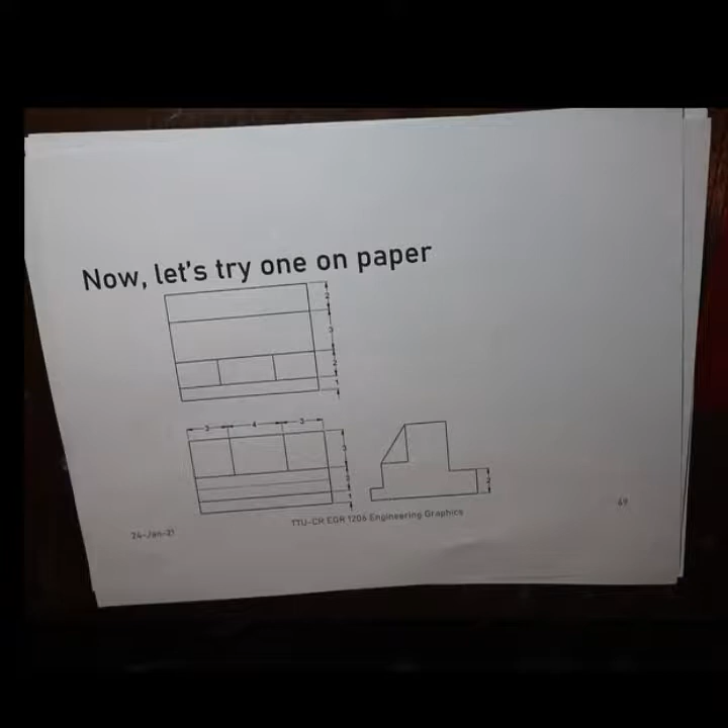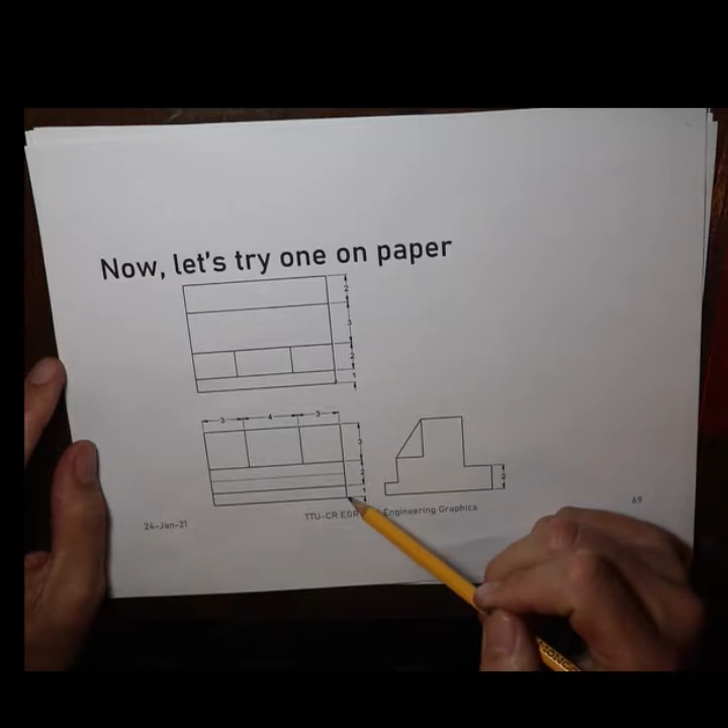Okay, now let's do our drawing here. Right, so we have our front view, our top view, and our right side view. And we're now supposed to create the isometric drawing from this. So let's do this. What we'll do is we'll start on this corner right here. Right, this corner is the same as this corner, and then we'll draw out in all directions.

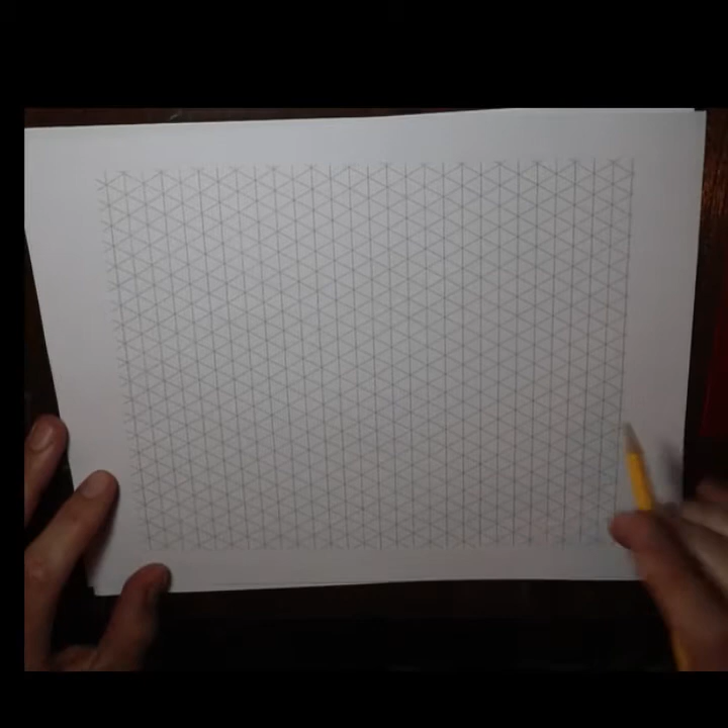So here is my piece of paper. So the first thing I want to know is how big is this going to be side to side. So our front view here is 10, and towards the back it is 8. Okay, so let's count out quickly here if we can do full boxes. If we start maybe at this point right here, just choose one. 1, 2, 3, 4, 5, 6, 7, 8, 9, 10. That'd be there. 1, 2, 3, 4, 5, 6, 7, 8 would be here, so that fits.

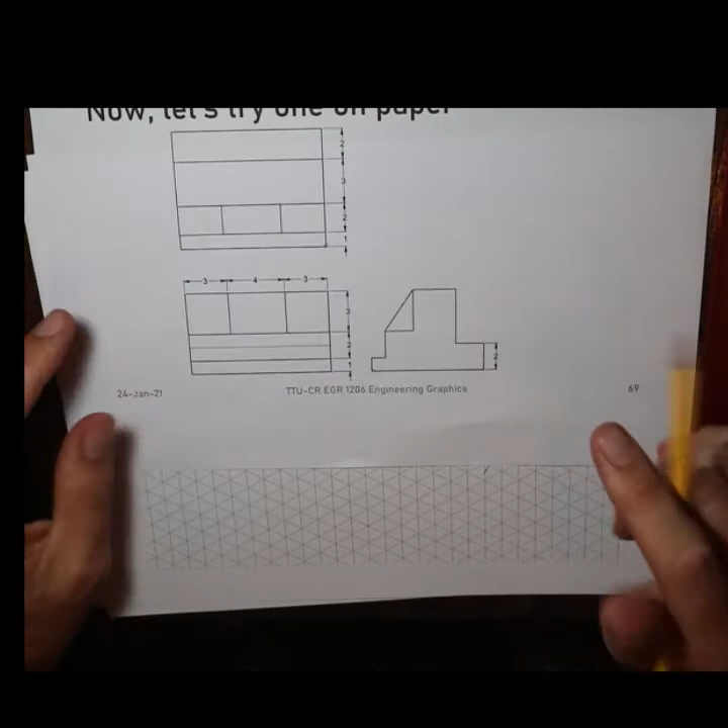Now from the height, that'd be 6 high in total. So it'd be 1, 2, 3, 4, 5, 6 on my piece of paper. And then if I scooch over here, it looks as if it's going to fit. Alright, so this is going to be our starting point. Then let's start. So we start by drawing all the lines that are parallel to the axes.

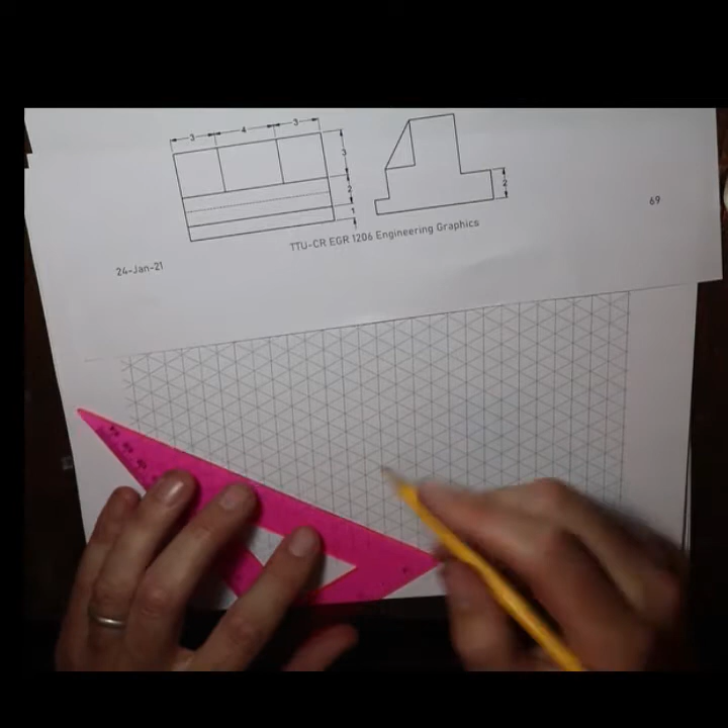Alright, so certainly this line right here is parallel to an axis. It's parallel in this view, it's parallel in this view, and it would be the line that goes right into here. And there's nothing strange going on, so we can be pretty certain that's a nice straight line. So we can draw that one to count it out. 1, 2, 3, 4, 5, 6, 7, 8, 9, 10. So that would be our line in that direction. That would be this line.

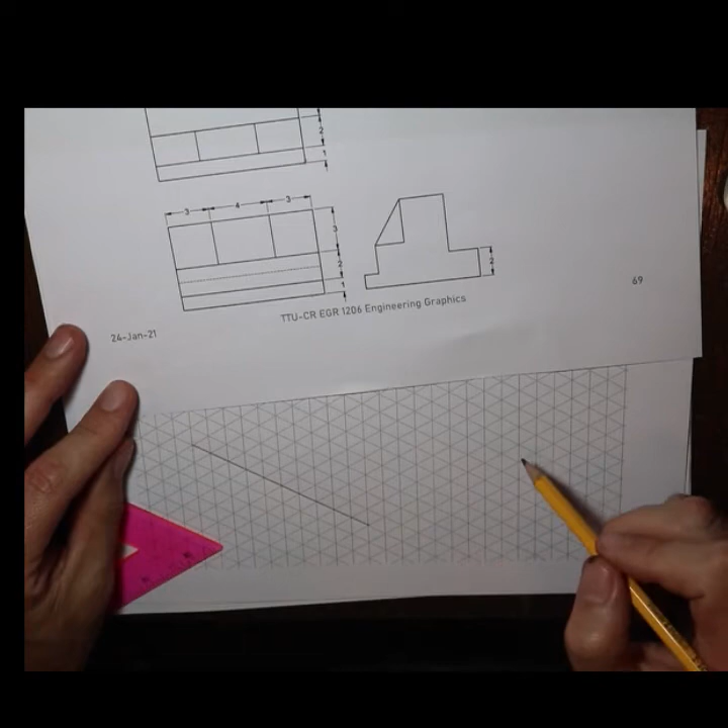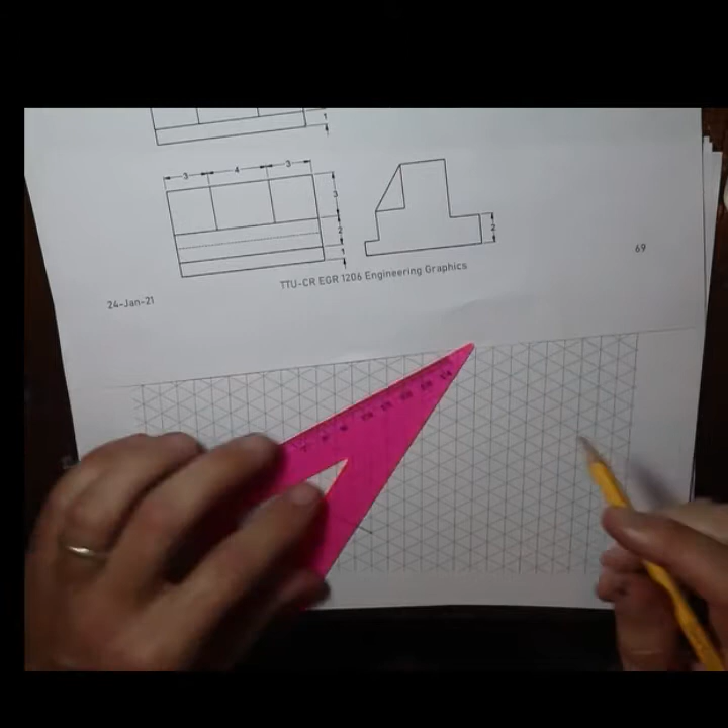Now we have a bunch of choices. Oftentimes I go into the depth then. So what do we see there? There we see our depth would be this line here and this line here. Right? They're the same line. They're all parallel. And there's nothing much going on in that corner, so we can pretty much be sure that it's a straight line. So that would be 8 in this direction. 1, 2, 3, 4, 5, 6, 7, 8. There we go, that'd be that line.

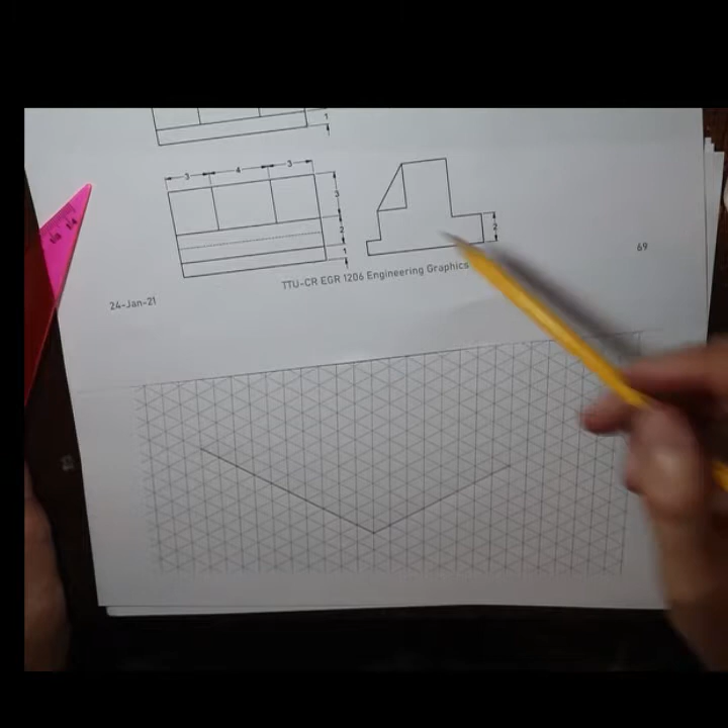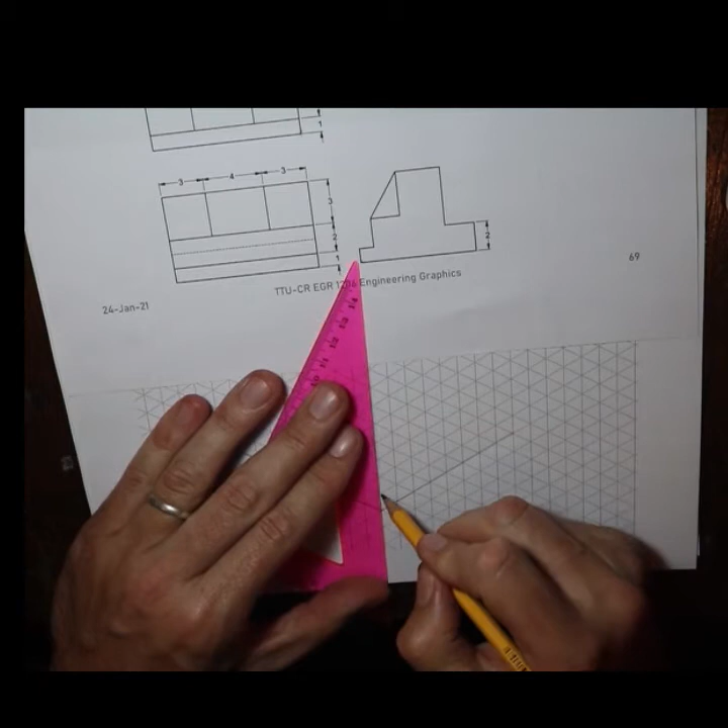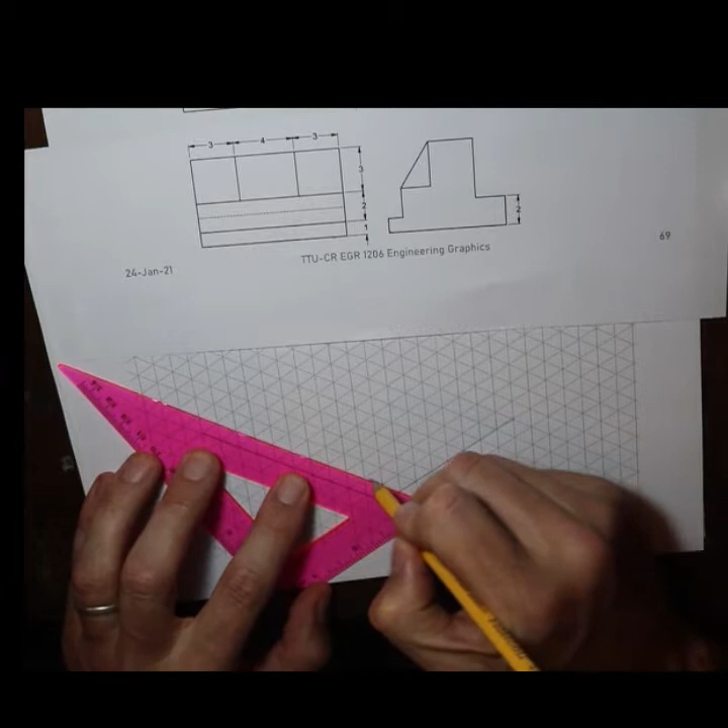Now we could start drawing to the back, but that's always risky because we might be blocking the back, right? So we don't want to do that. So maybe instead we can go back to our front corner here and start going upward, right? So if we are here, this line is going straight up. That's this line right here. We know that's 1, so we can go up 1 block in this corner. That's good. And we see that that edge here goes all the way across. That's that edge here, the same as this edge along here, so we can draw that all the way across as well. Should be 10 spaces over, up onto here, and then down as well.

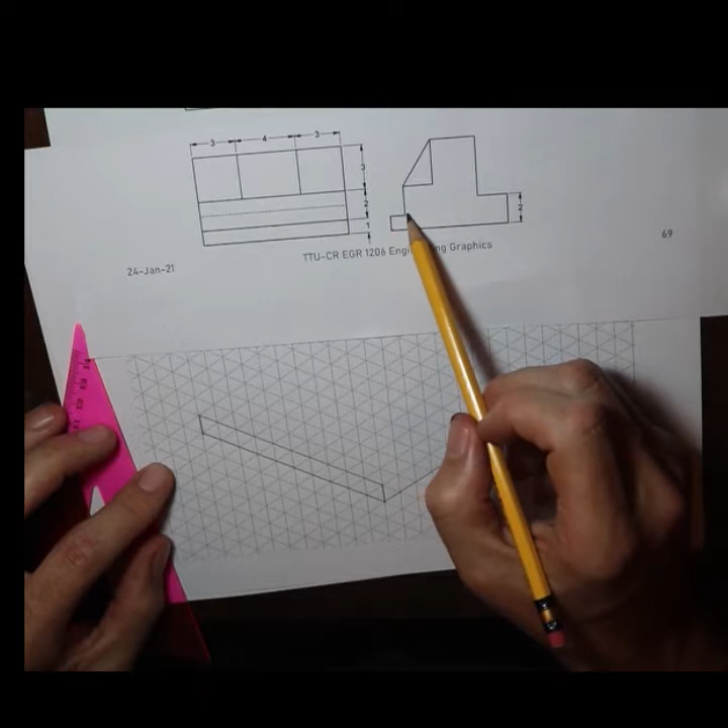All right, so now we have our front, this area we see, right? So now we can keep on going. We can see that it goes inward now, right here. If we look at the side view, we see this one's parallel here, and that'd be this edge. Oh, you can't see it right here. It would be this edge right here. This edge right there. And it's nice and straight here, so we can go in. It says here the width is 1, so let's go 1 in that direction. On both sides.

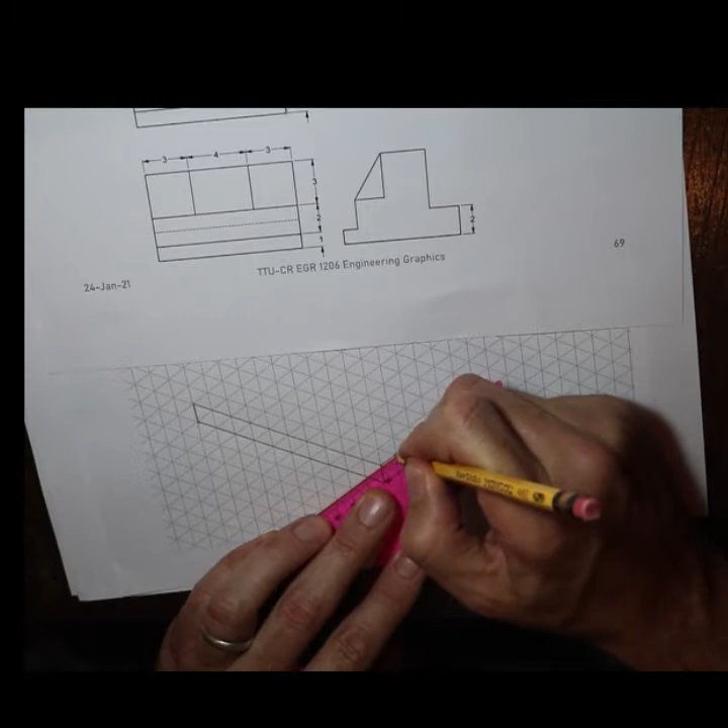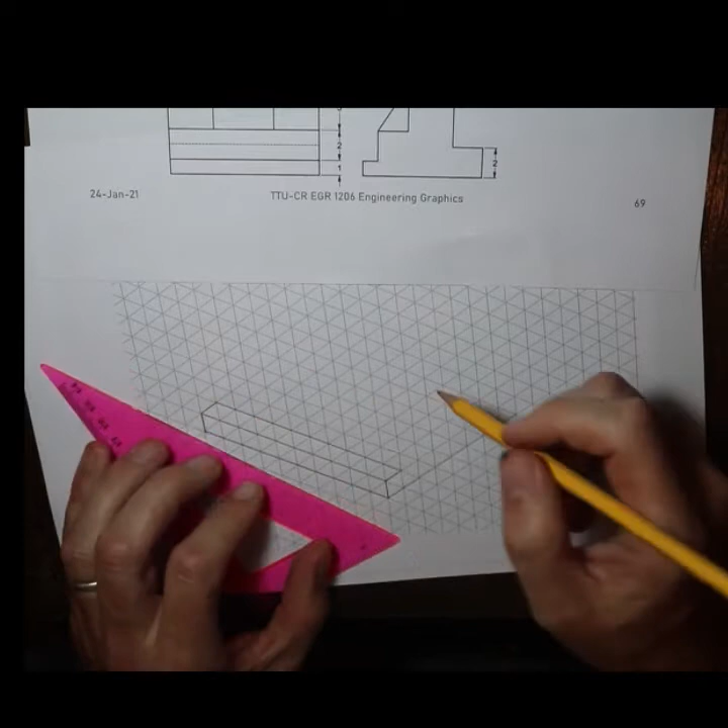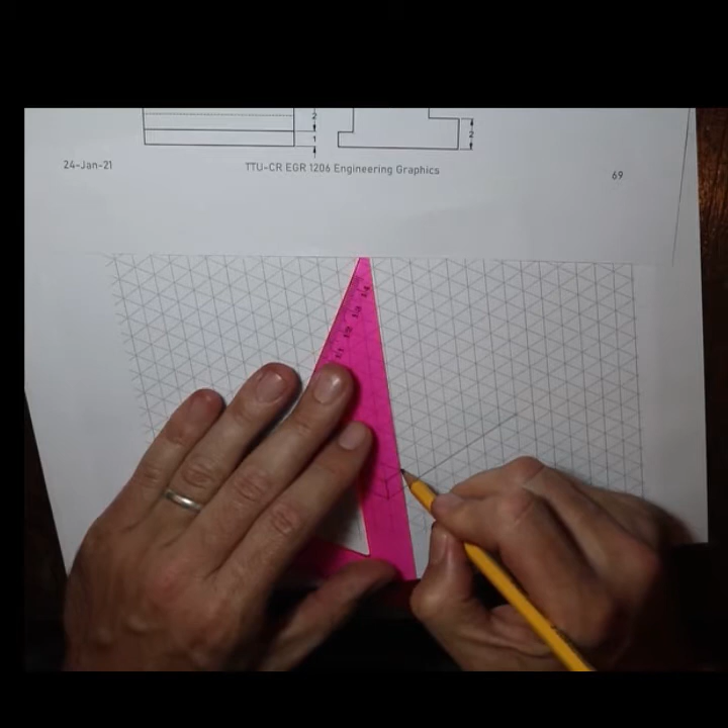And then of course we would be at this edge now. And this edge is straight here, straight there, nothing going on in that corner. So we can draw it. We have that there, very nice. Now what else? Well, we can see we're now in this corner right here, right? So this is going straight up. It's parallel here, it's parallel here, and it'll be the point that's coming out. So we know it's supposed to be 2 high. So let's draw 2 on this end, and then 2 on this end, and then we can connect them. Because of course this edge here goes all the way across, that's here, and that's there.

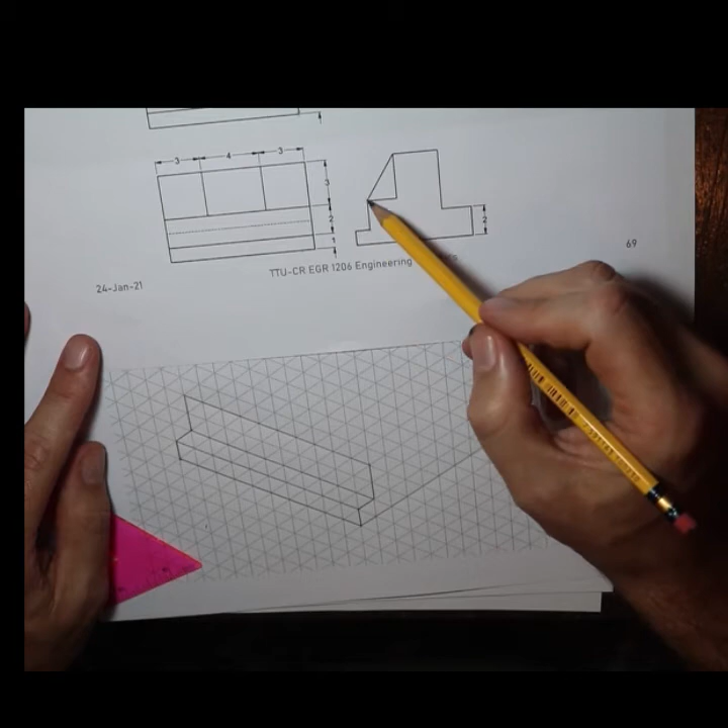Okay, I think we can just continue in that direction, right? So we are now up here. So let's go in. We can say it's parallel here. That would be the edge here, right? It's the edge that's going in. So that is going in, and that is going in a width of 2. Oops, get that right there. So 2 in this direction.

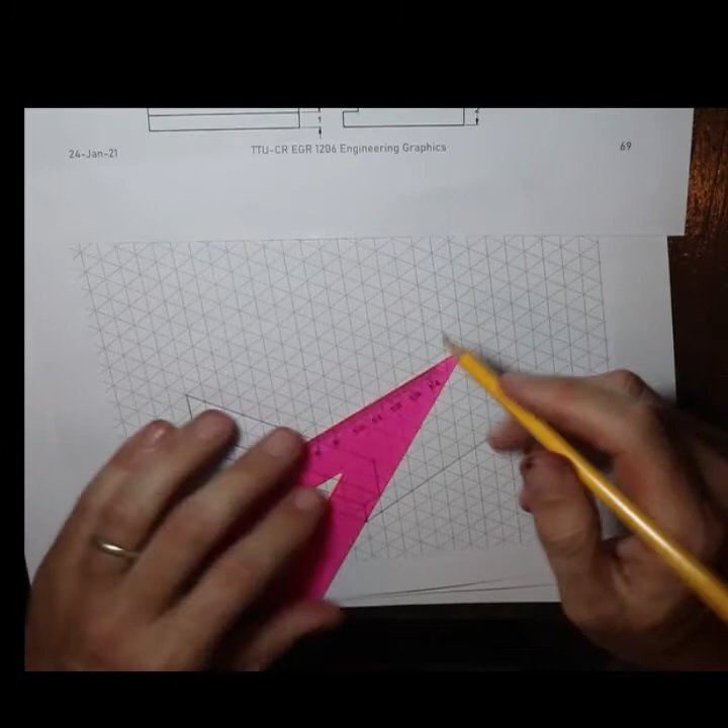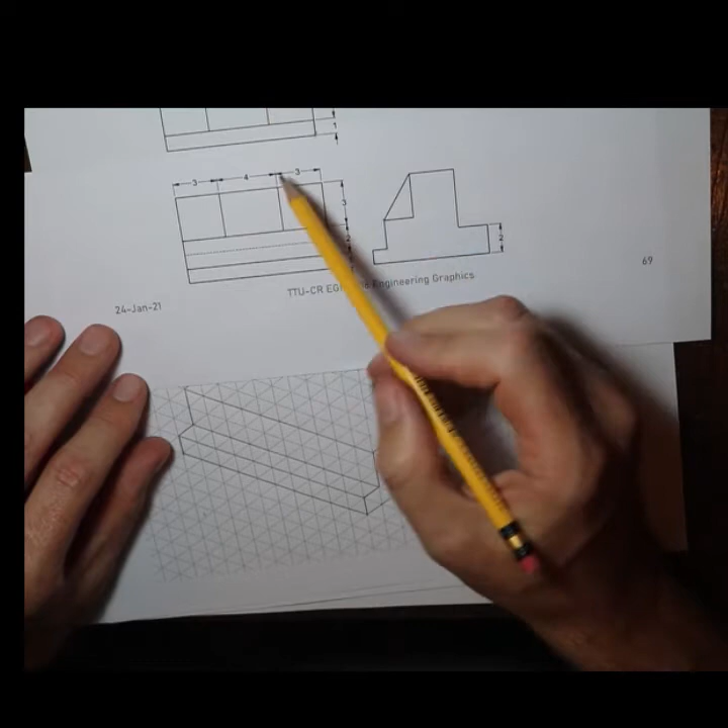And because it's all symmetric, we can do 2 over here as well. So we have 2 and 2. Then what else? Now, this edge is a little tricky because we have whatever's going on here, right? So let's maybe not draw this line in here yet. Let's continue. I mean, we could because we're using pencils. We can always erase stuff, but let's not if we don't need to, right?

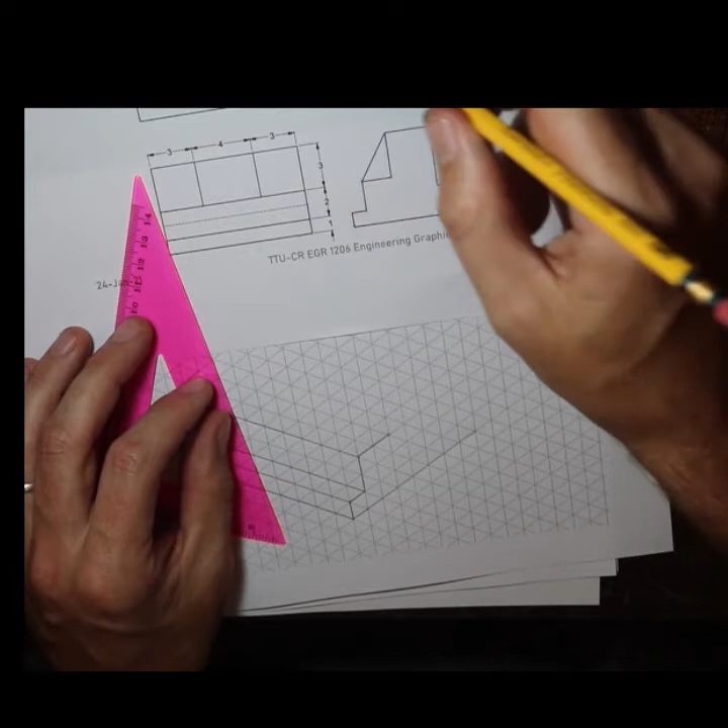Because we see we have this triangle coming out here, right? So we don't know where that triangle exactly is, so it might interrupt our line. But we can continue with this line because we do know that line exists, right? It's parallel here, and it's parallel here, and it's the line that will be going right in there, right? So we know that has a height of 3.

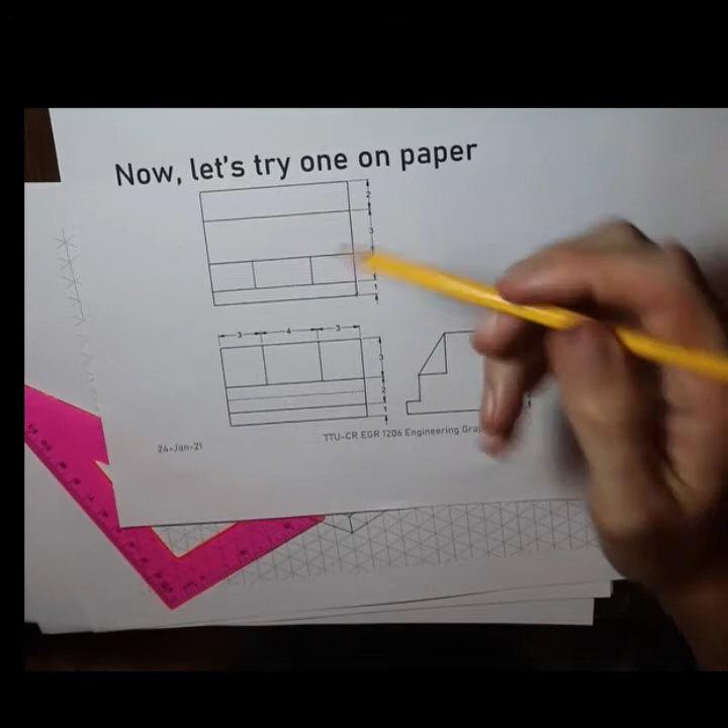Go up 3 here, and the same on the other end. Go there, and then we go across. Alright, so now we just drew basically the top here, or the edge here, right? That's what this is. So now we see this is a nice rectangle, we can draw that in, right? That's right here and right there, so it's all nice and flat in there.

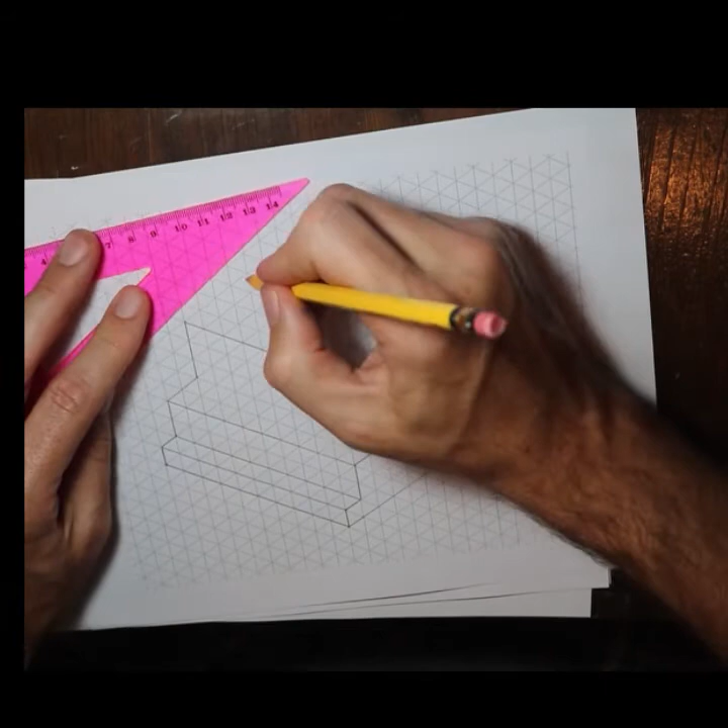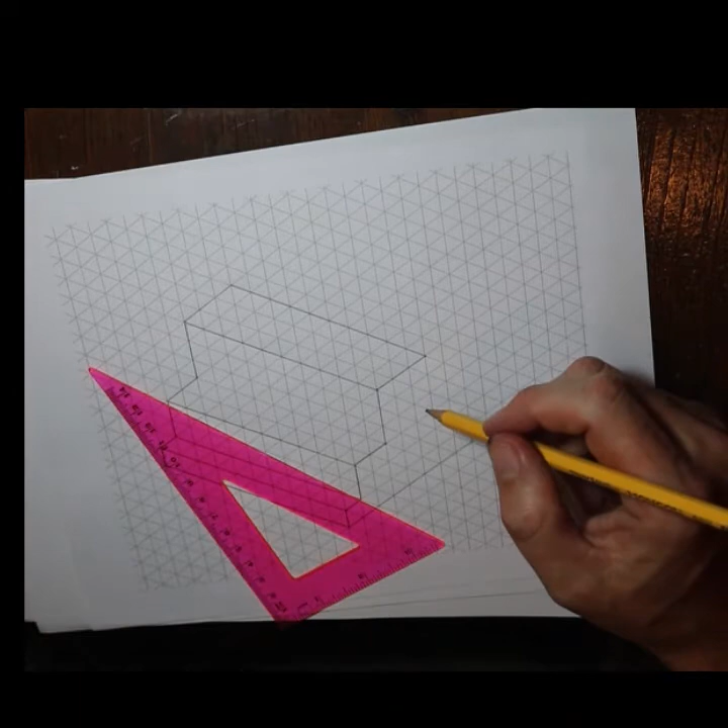So that triangle there is 3 deep. So we go 3 in this direction, 3 here, and 3 here, and then across. Like that. 3, 3, 3. Very good. Now we're at this corner. Let's wait with this triangle for a little bit, but we're at this edge now.

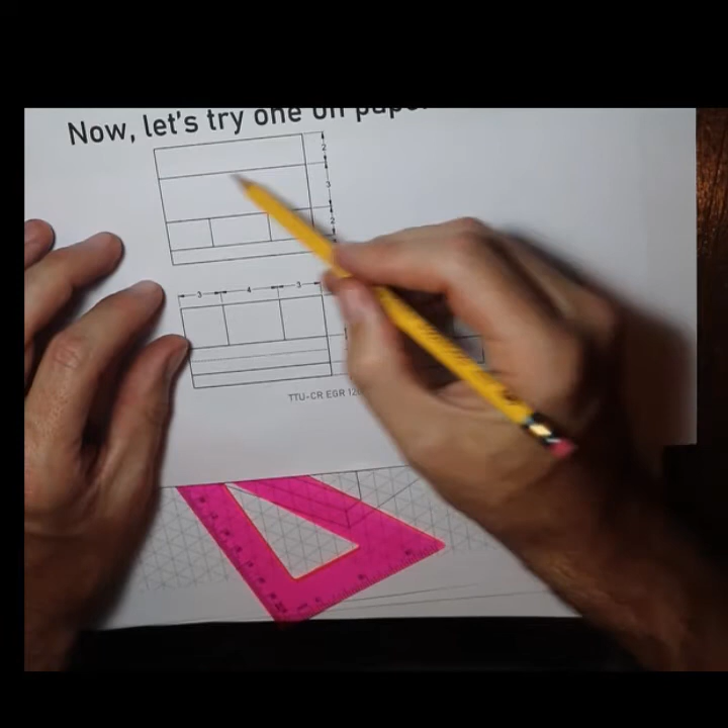So now we can say, well, we're here on this edge, right? Now we're on this edge right there, which is kind of the top plateau here. So now we want to drop back down. And the other way you can do it is we can start at this corner and go 2 up. Right, so it's kind of our end here. So let's go 2 up from this end.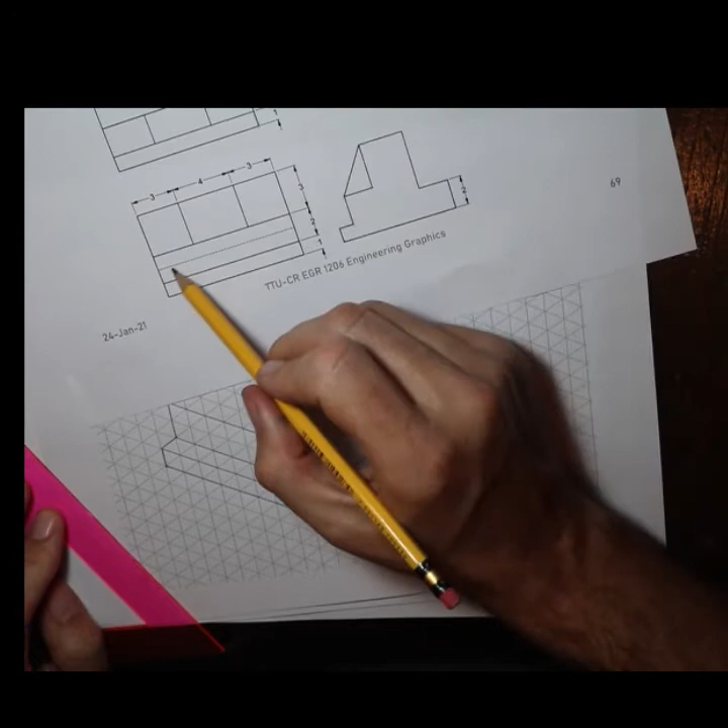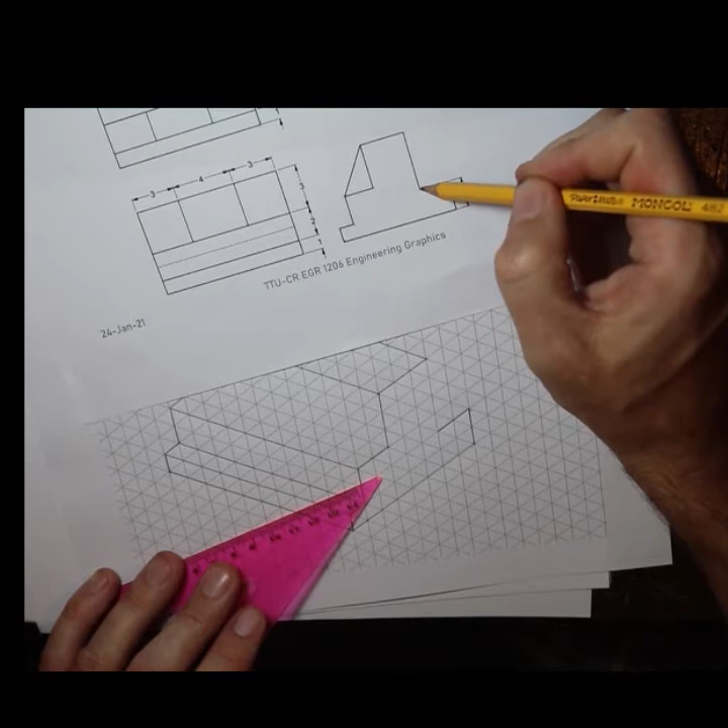We're now in this corner, and we can then go in. All right, that going in, that's our hidden line right here. So it's nice and straight there. It's parallel here, right? So we can go 2 in that direction. Two in that direction. That gives us this point. So now all we have to do is go straight up, and we hit the rest of our shape.

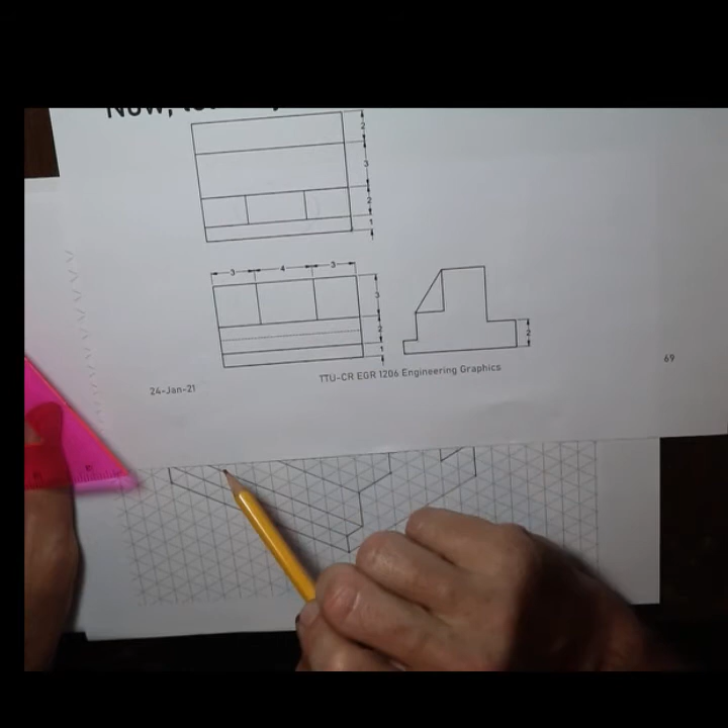Okay, so that's a good start, or more than a good start. We're pretty much done. All we're missing now is this triangle here, right? This triangle that we see is kind of this feature right here. So we need to somehow draw that feature in. So let's see. We can find where these corners are, right? These are 3 in, both top and bottom.

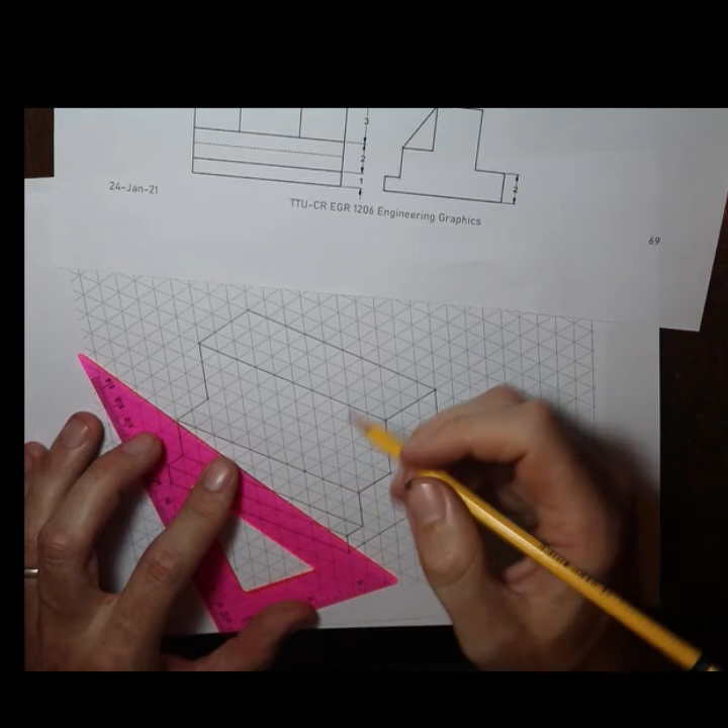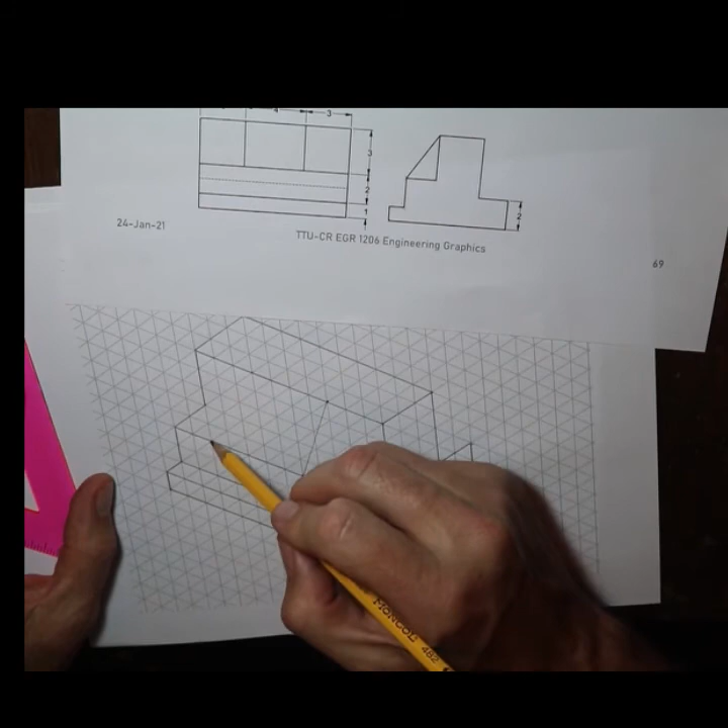So that means on this edge there's a corner that if I go 3 in, 1, 2, let's make a little bit of a dot there, and the same here, 1, 2, 3. And I can see it's a straight line, so I can just connect those 2. There we go. The same thing I can do from the other end. Either way, I can count 4 or I can count 3 from that end. I like smaller numbers. 1, 2, 3. We can draw that connection.

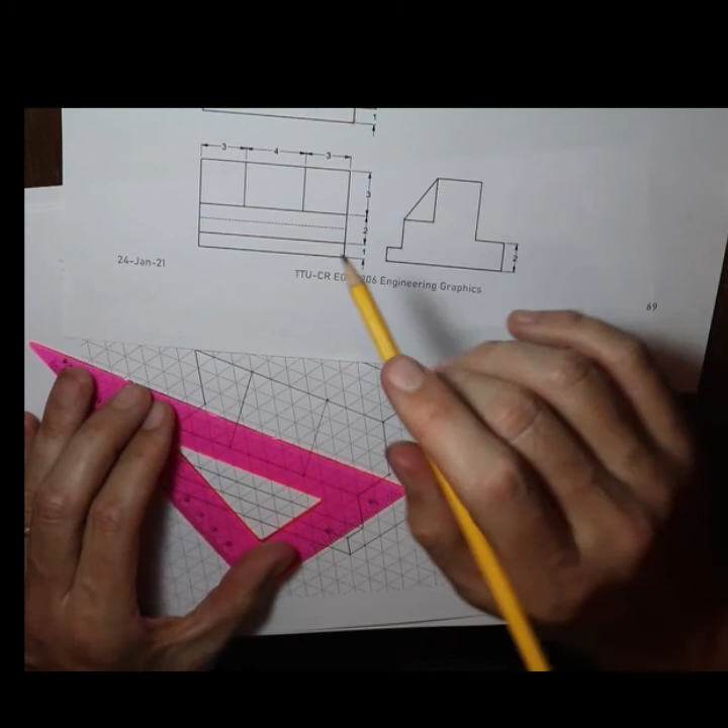All right, so now we can kind of see this rectangle, with the triangle kind of coming out. So now all that's missing are these back lines here and these front lines around here. Our lines in the back, we have to make sure we don't draw them too long. That's why we didn't draw them before, because we knew they were going to be blocked. So this edge is the edge in here, the one that goes along here before I hit the triangle. So basically along this way.

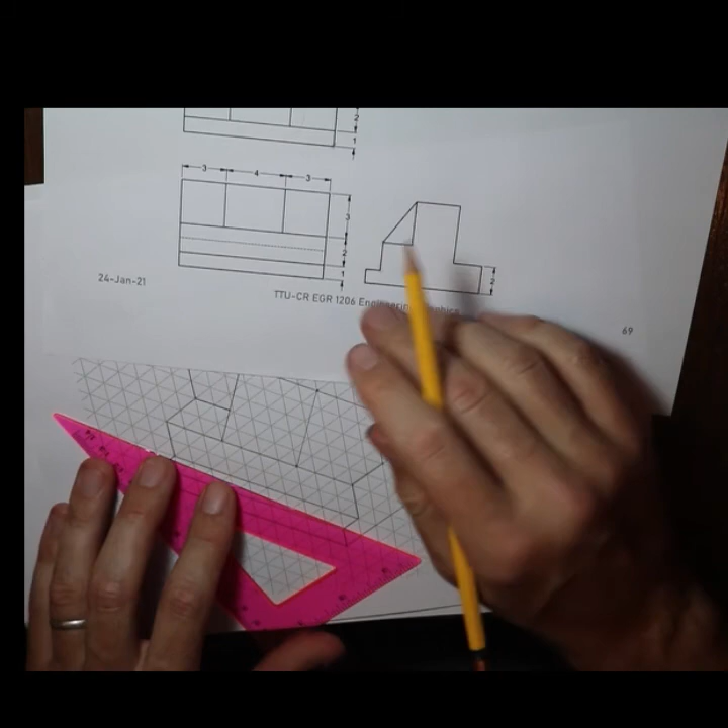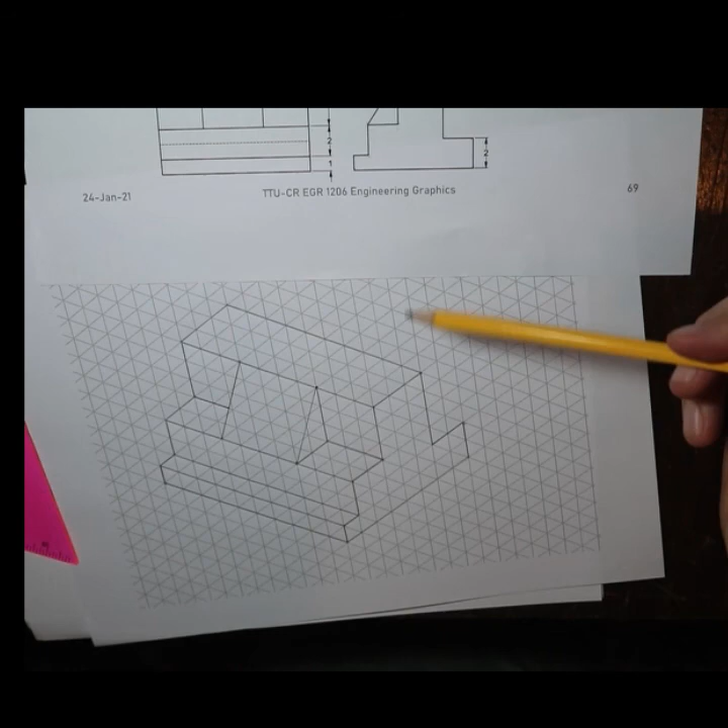And then, on this side we have to be careful. On the other side we also see the side of this triangle, right? So we have to draw that in. So that triangle is 3 going down and then coming straight out. And now we can put in our last piece here. And with that, I think we are done, right? Because anything back here is of course blocked by the rest of our structure. Yep, I think that is all we have for this drawing.